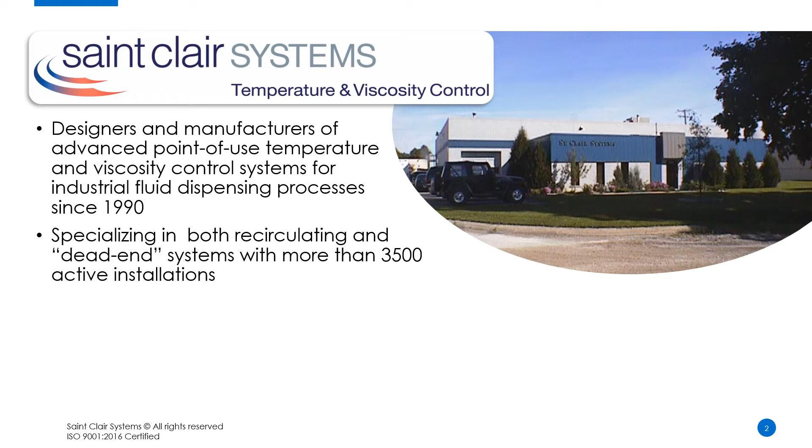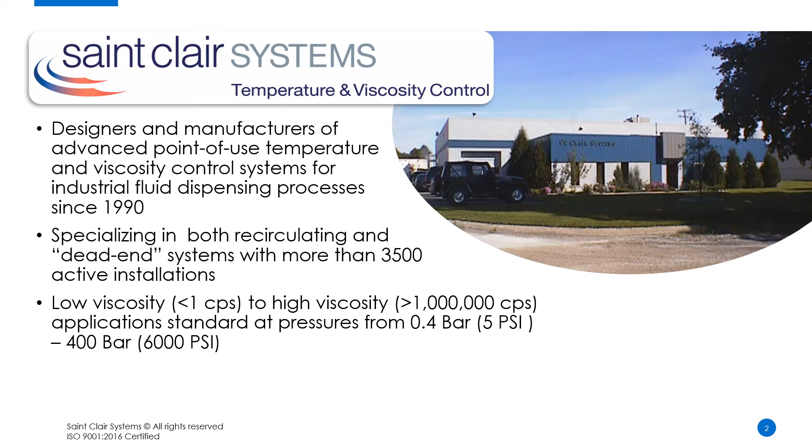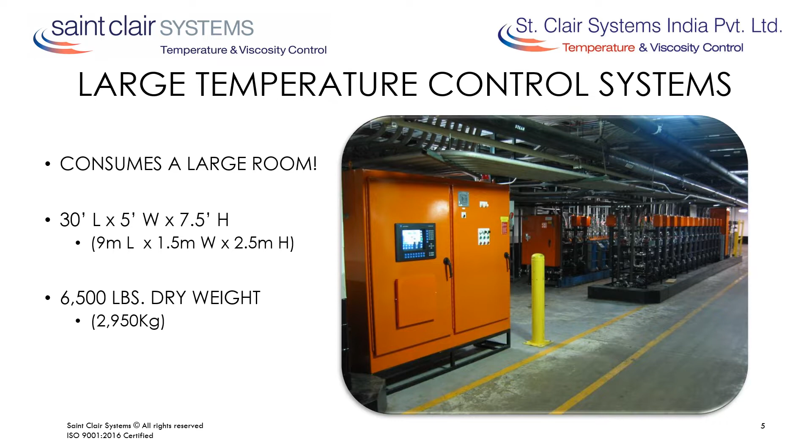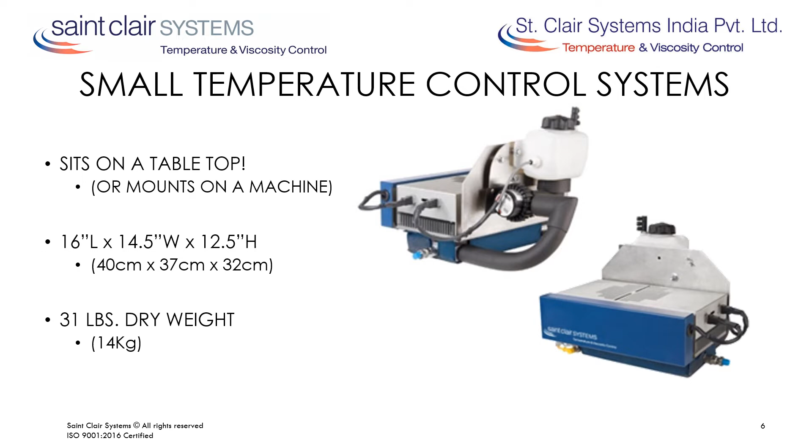We build a variety of systems to meet every application, from large systems consisting of modules up to 10 meters long, weighing more than 3,000 kilograms and costing upwards of $500,000, to small systems that sit on a tabletop with a footprint of less than 40 square centimeters, weighing less than 15 kilograms and costing less than $5,000. In addition, we have a line of viscometers, which includes our VTS inline unit. Designed for continuous in-process control, it has no moving parts and is constructed entirely of 316 stainless, so it's compatible with all process fluids. At just 21 centimeters long and 6 centimeters in diameter, it's small enough to fit easily into virtually any dispensing system. This allows you to eliminate the uncertainty of manual viscosity measurements for less than $5,000.

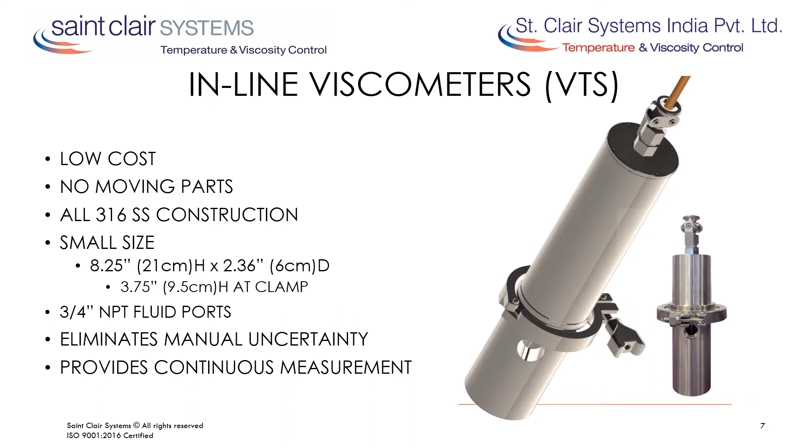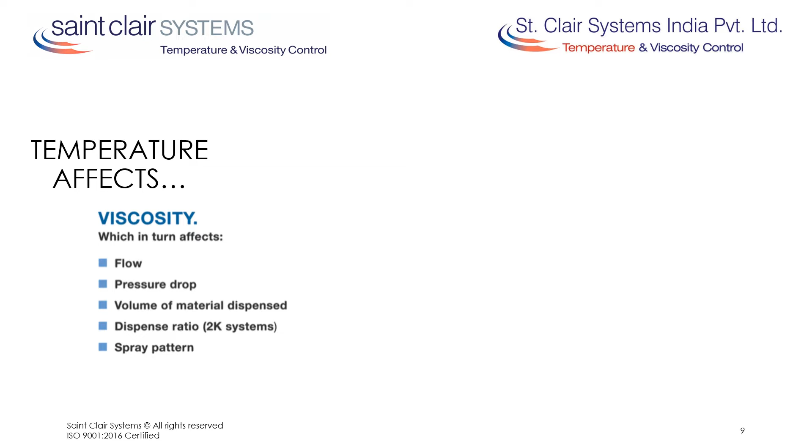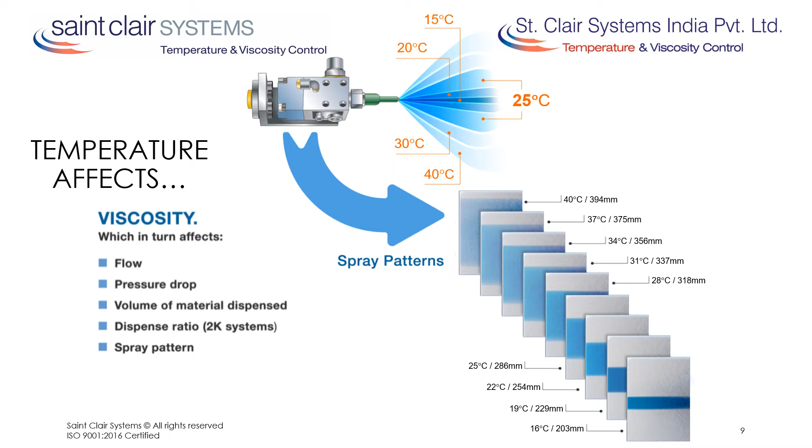So let's look at the fundamentals that create fluid dispensing issues in the first place. We're often asked why we focus on temperature, and the answer is that temperature affects viscosity, which in turn affects flow, pressure drop, volume of the dispense, and the ratio in the case of 2K materials. But most of all, the spray pattern. Here we can see how the spray pattern changes, with the width increasing proportional to the temperature, but this phenomenon is actually caused by the change in viscosity.

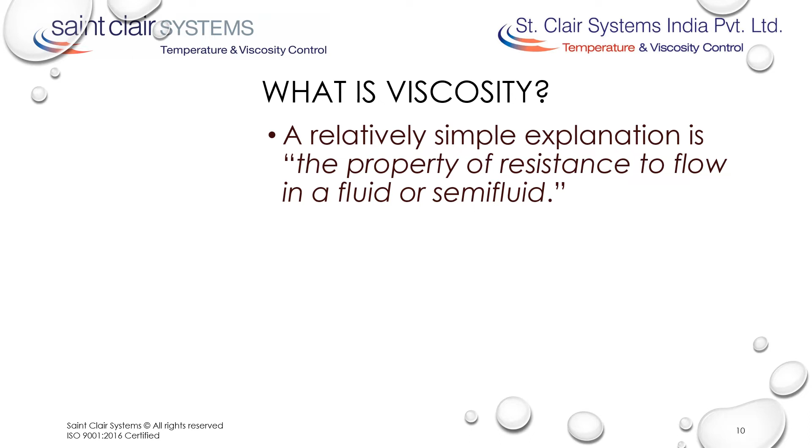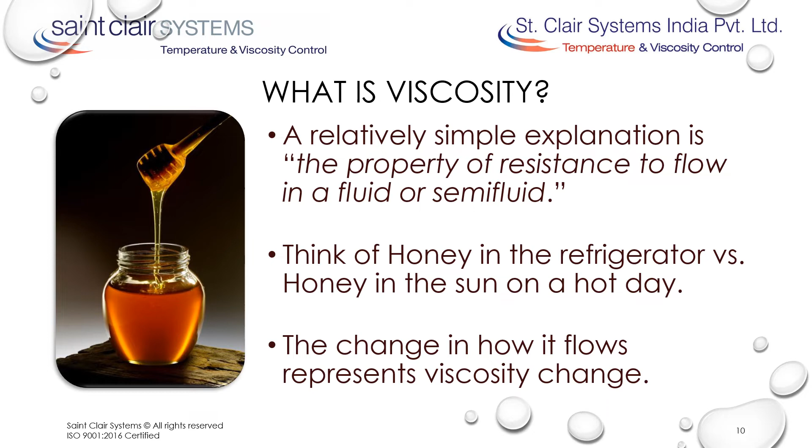Which begs the question, what is viscosity anyway? A relatively simple explanation is the property of resistance to flow in a fluid or semifluid. Water is the universal definition of a fluid, but what is a semifluid? Honey is a great example. Think of honey when you put it in the refrigerator. It gets thick, very thick, in fact, almost solid. But take that same honey and place it in the sun on a hot day, and the change is dramatic. It thins out significantly, and you can pour it, almost like water. This change in how it flows represents its change in viscosity, and in this case, as we'll discuss a lot today, the cause is the change in temperature.

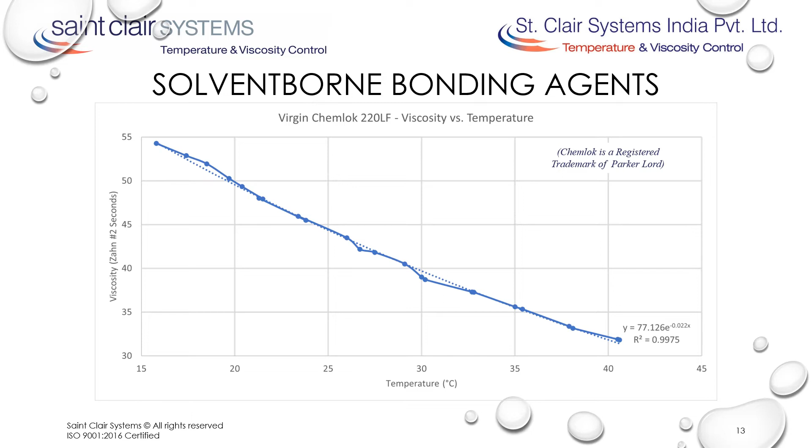For instance, here we see the viscosity temperature curve for Parker Lord's Chemlok 220, a common solvent-borne bonding agent, as measured in St. Clair Systems India's lab. It's the typical curve we're all familiar with, the viscosity falling as the temperature increases. Though it looks like a linear relationship with a slope of approximately 0.9 seconds per degree C, when we apply an exponential trend line, it reveals that, as with most modern coatings, this is actually an exponential curve. Another interesting fact is that Parker-Lord's DS3105 datasheet recommends that this coating be applied at a viscosity of 22 to 28 seconds, which is obviously below the minimum value shown in this dataset. This indicates that it must be diluted in order to be sprayed.

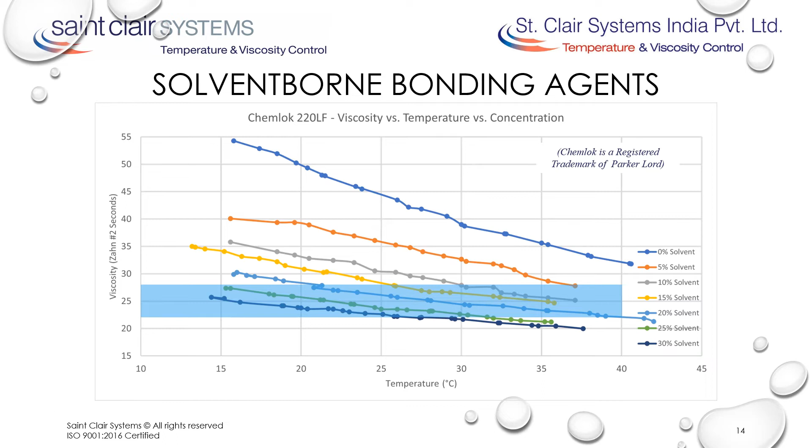That same datasheet recommends that this coating be diluted with 25 to 50% xylene. Here we can see the viscosity versus temperature curves for various dilutions of Chemlok 220 as prepared by St. Clair Systems India. If we project the recommended spray viscosity range of 22 to 28 seconds across these curves, we can see the importance of the interaction between dilution and temperature in the actual viscosity of the fluid. It is apparent that, depending on the temperature, dilutions as low as 5% can be used, whereas dilutions of 25 to 30% on the low end of the recommended range can produce viscosities outside the recommended range. It also seems clear that dilutions greater than 30% will produce viscosities below the recommended range for spraying across nearly all temperature conditions. But it is important to understand that adding solvent alters the carefully developed coating formulation, and this solvent creates many issues with our process.

First, this represents excess cost, because every drop of added solvent will be driven off in the oven as the coating is cured. In addition to the environmental concerns, it also represents a risk to our operators.

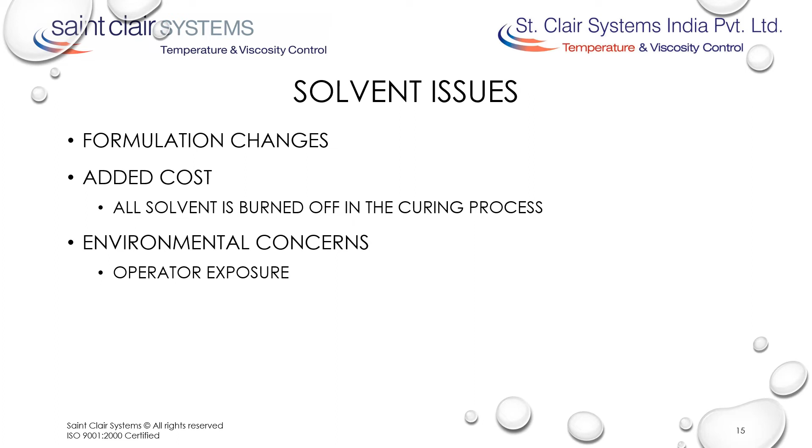To make matters worse, too little or too much solvent can cause defects. We can plot this on a continuum. If we have too little solvent, we get dry spray and all of the associated issues. If we add a little more solvent, we reach the optimal performance level. However, if we continue to add solvent, we start to get cure issues which, as we add more and more solvent, can progress into problems with adhesion, blistering, and even solvent pop.

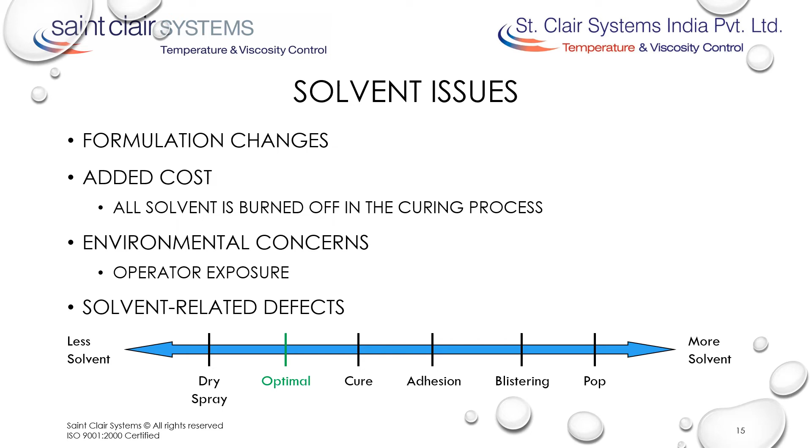This is why the temperature factor is so important. So, it's important to understand the impact of viscosity in our process. Proper coating viscosity is key to successful process outcomes. Yet even in today's modern applications, we usually make one viscosity adjustment at the beginning of the process, and we usually make that adjustment by adding solvent. And we generally ignore the impact of temperature on our process outcomes.

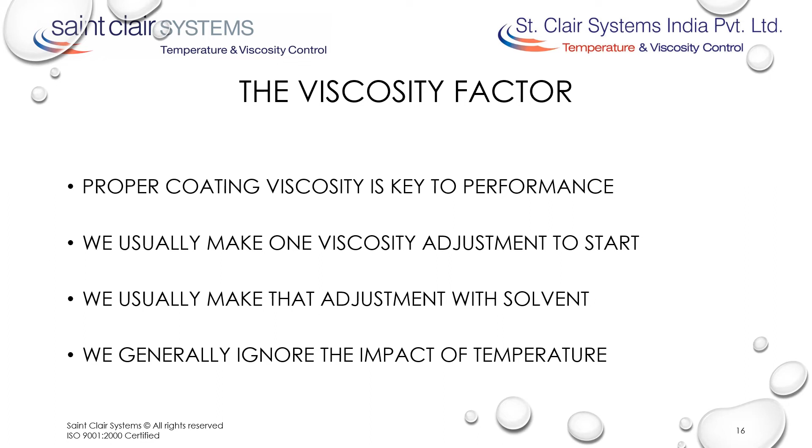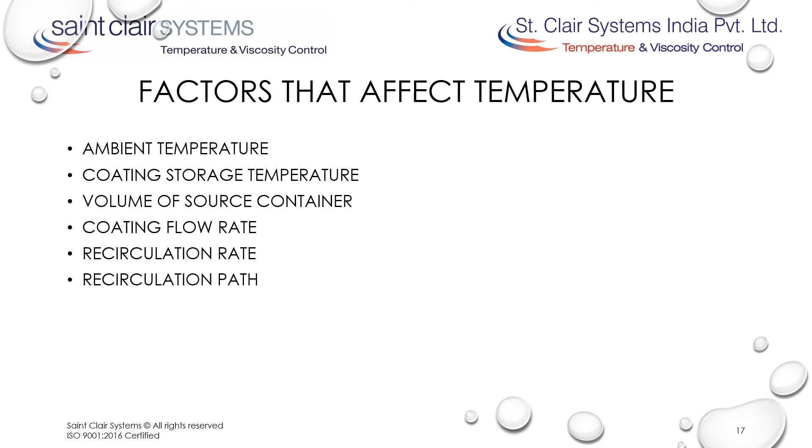So what factors affect temperature? Well, there's ambient temperature, coating storage temperature, the volume of the source container, the coating flow rate, and the recirculation rate and the path through which that recirculation follows, pressure settings, pump type and horsepower, shear, which comes from pumps, agitators, regulators, nozzles, fittings, etc., and the substrate temperature.

It's important to remember that friction and shear equal heat. This is the reason that simply controlling ambient temperature is not effective. Besides, it's also important to remember that often the fluid we're dispensing comes into our carefully controlled process from a totally uncontrolled area. This means continuous changes in temperature and therefore viscosity.

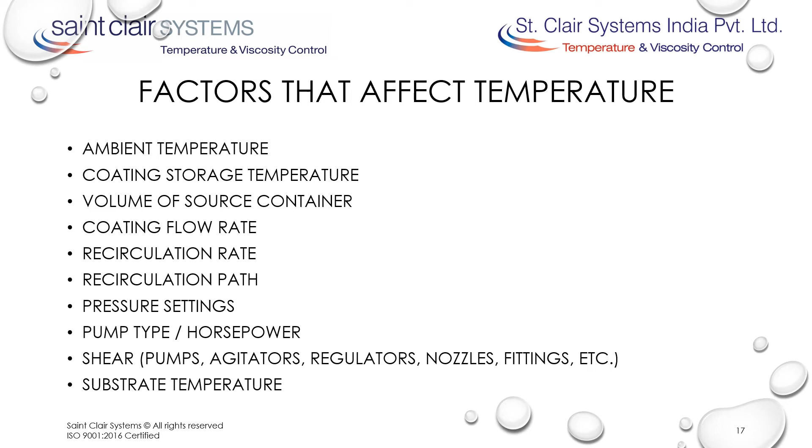So how do these temperature-induced viscosity changes affect Chemlock and primer? It's all about film formation. So let's start with a perfect film. If the viscosity can be controlled and the system set up such that atomization, deposition, and film build are even across the part, the cure will be even and the result significantly more predictable. This more consistent surface will also produce a better bond. Not only will the bond be stronger, but the layer will be significantly stronger as well.

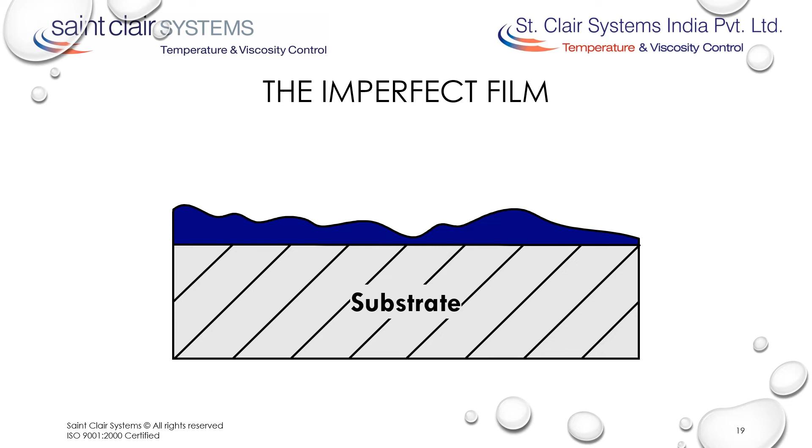But creating a perfect film requires perfect conditions. More often than not, however, conditions are not perfect. As we've already seen, if the fluid temperature is wrong, it will affect atomization, spray pattern, flow out, etc. The result is an uneven film across the surface of our part. This can have a significant impact on our film cure. Here we can see that thinner film areas will cure more rapidly than thicker film areas. This uneven surface will have a negative impact on bond performance.

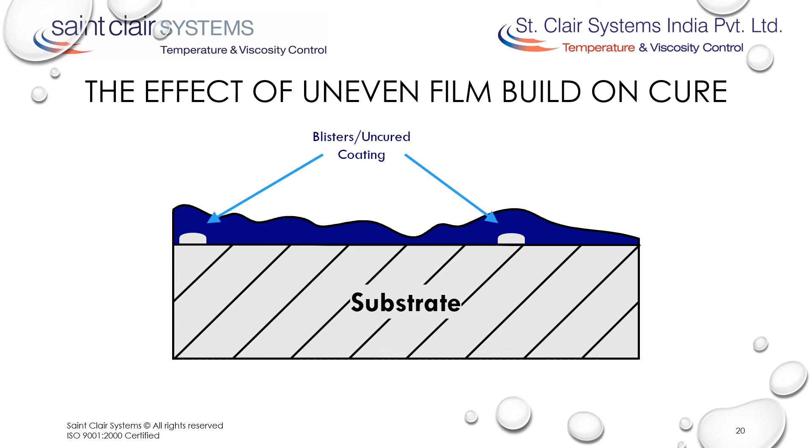It's also possible to create blisters from solvent entrapment under the cured surface of the coating. Obviously, this will have a negative impact on bond performance. To make matters worse, if the thinner film areas are within spec, the thicker film areas represent excess coating being applied, which equals cost.

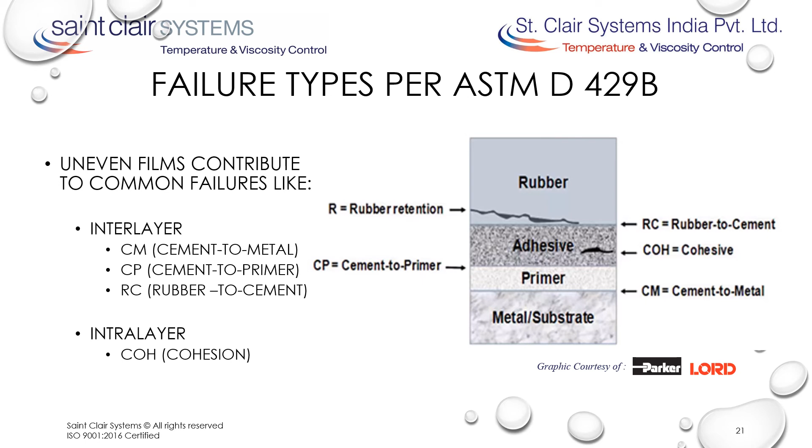So what defects can we attribute to these temperature-induced changes in Chemlock and primer viscosity? The same ones you're used to. First, there are the interlayer failures. These are the result of poor bonding between the substrate and the primer and the Chemlock and the rubber. Then, there are the intralayer failures, often defined as cohesion failures. It's easy to see how these relate to our temperature-induced film variations.

First, we have to start by establishing our dry film thickness range. Per data provided by Parker Lord, primers should be applied at a 5 to 10 micron dry film thickness. The top coat or adhesive should then be applied at an 18 to 25 micron dry film thickness, for a total dry film of 25 to 30 microns. Likewise, a single coat application should be in the 25 to 30 micron dry film range.

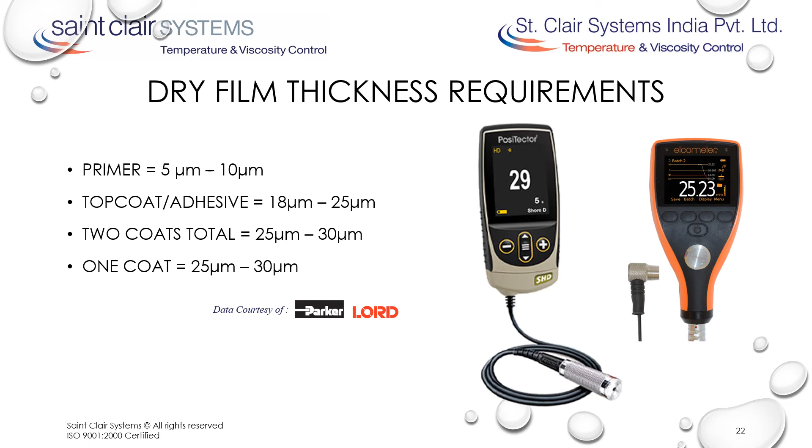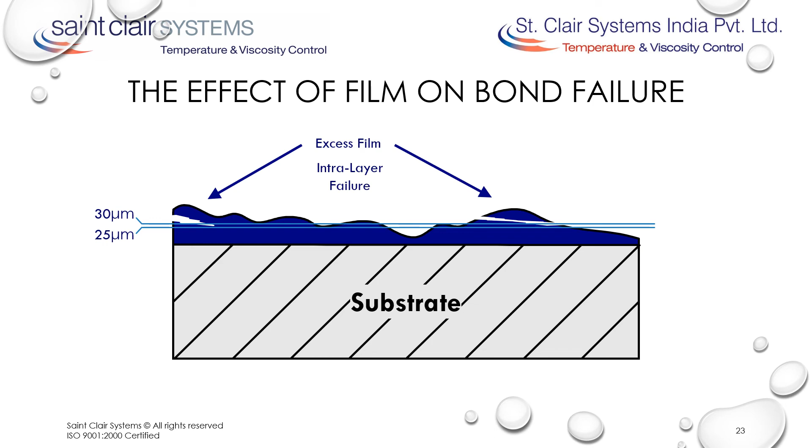So now, let's return to our film build example. Here, we can see that we have film thicknesses both above and below the recommended 25 to 30 micron range. Accentuated by the unevenness of the surface, the areas with insufficient film will be more difficult to bond to and will be prone to interlayer failure. Conversely, the areas with excess film will be subject to intralayer failure because the excess thickness compromises the strength of the layer. In order to get a predictable film repeatedly, the goal must be to stabilize and optimize the viscosity of the coating material at the point of use, which, in spraying systems, is the nozzle orifice.

No other material temperature in the system matters to the stability of the coating process. So how do we manage that?

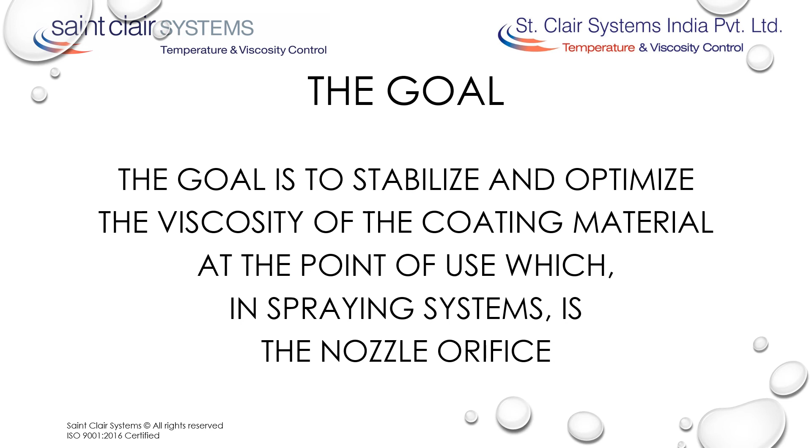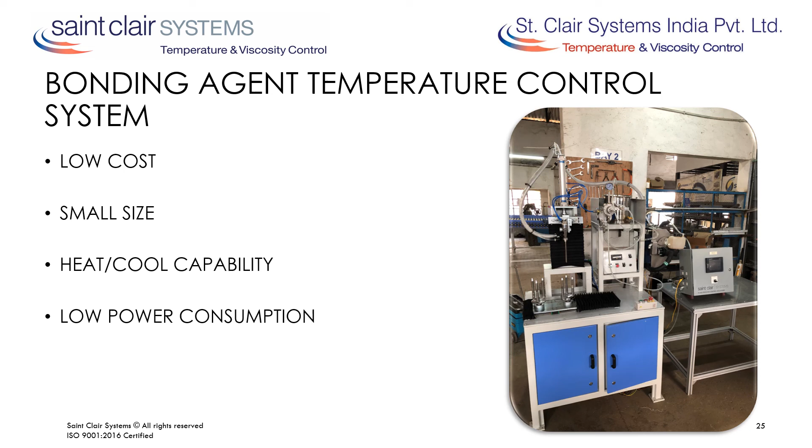Here's an example of our bonding agent temperature control system installed on an automated spray system. It's the perfect solution because it's both low in cost and small in size. It is capable of both heating and cooling as required, so the fluid temperature will always be correct regardless of changes in ambient temperature from morning to night and season to season. Its low power consumption makes it economical to operate on a production basis, and we utilize our patented recoilable coax hose technology to carry the temperature control all the way to the gun to establish point of application control. And it works for manual applications too.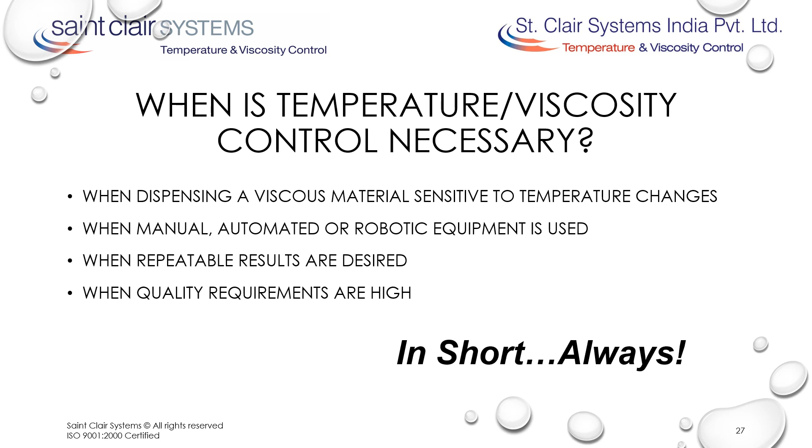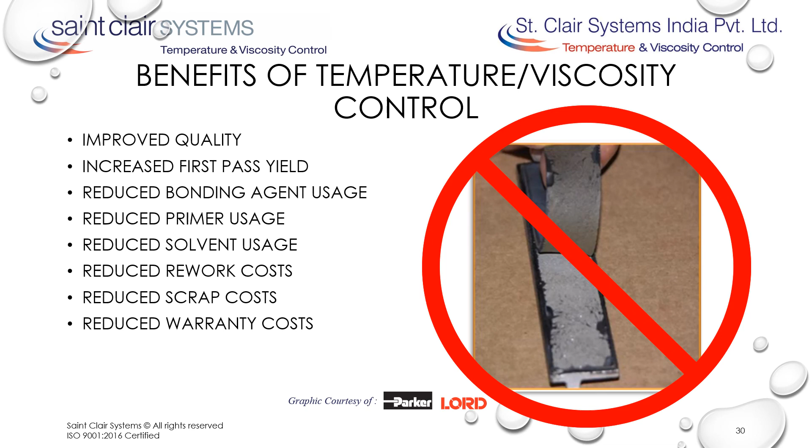The benefits include improved quality, increased first pass yield, reduced bonding agent usage, reduced primer usage, reduced solvent usage, reduced rework costs, reduced scrap costs, reduced warranty costs, reduced environmental impact, and reduced operator exposure.

So, again, I want to thank you for taking the time to be here today. Though we've only scratched the surface of what temperature and viscosity control can bring to your bonding agent application operation, I hope that we've opened a new window through which to evaluate your process.